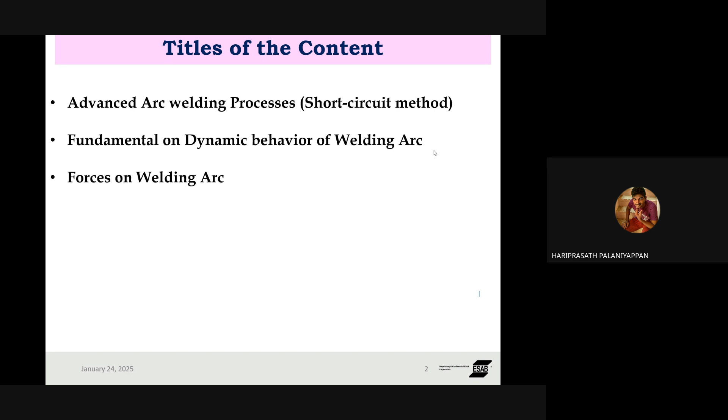The basic titles of this presentation are composed of three phases. One is advanced arc welding processes, purely based on short circuit methodologies. Then fundamentals on the dynamic behavior of the welding arc, and then forces acting on the welding arc - how the welding arc forms and behaves in welding processes. So we will detail these three titles.

So we are going with advanced arc welding processes. Nowadays, the reason we are going to advanced arc welding processes is there are many limitations and issues based on the complexity of our applications. The modern generation has grown up, and due to this and the requirement being more complex, for fabrication purposes we can't rely on commercial weld processes alone. So in the welding domain too, we are developing advanced arc welding processes to establish better solutions for current market requirements.

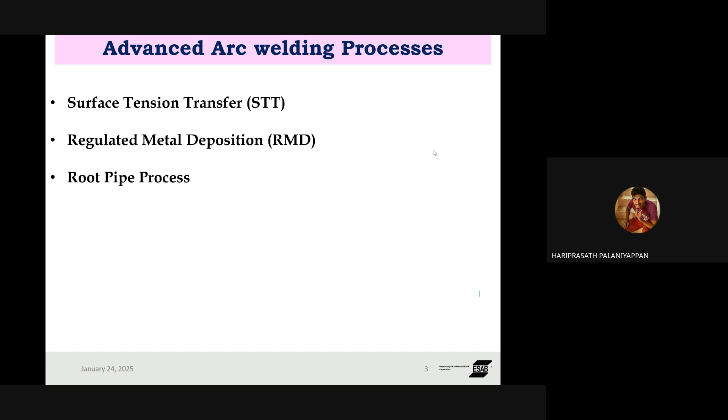So first of all, I start with the older process, surface tension transfer, which we call STT process. The second process is regulated metal deposition, which we call RMD, and then the root pipe process. These three processes were produced by three different major companies in the welding and cutting domain. These three evolved in different eras based on different advancements and market requirements. So we can go into why these processes evolved compared with our commercial arc welding technique in the upcoming slides.

Okay, so this is the conventional short circuit waveform. We know the MIG process - one of the most widely and highly used arc welding processes in the world. So among this, how will it behave? We can say it's a conventional GMAW process - gas metal arc welding. In other words, we can say MIG-MAG: metal inert gas welding, metal active gas welding. Based on the gas combination, it will vary.

So whenever we study the basics and fundamentals, we study about the arc, but we don't want to go into the in-depth concept of the arc. But if we go into the in-depth concept, let's see this figure. This shows the conventional GMAW short circuit process - it clearly shows how the short circuit forms, how it gets contact with the base material, and how it detaches corresponding to the current and voltage. From this figure we can clearly see 6 different phases, and based on these 6 phases there are differences in current and voltage, corresponding to current and voltage. So here in the first phase...

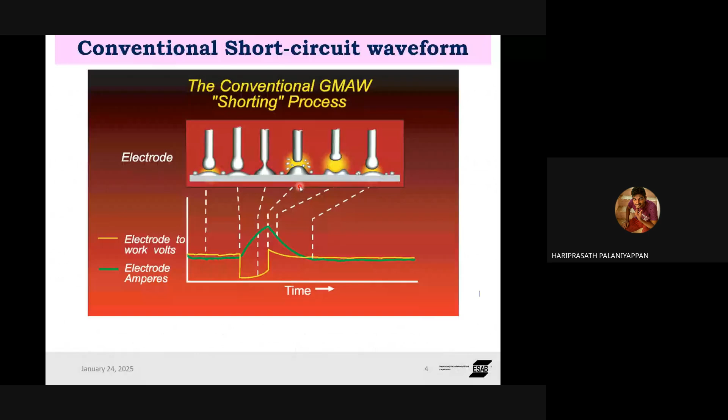These are all the conventional short circuit waveform. So why are we moving from the conventional short circuit waveform to this new waveform? We are getting some limitations for the root welding - larger heat input. This can lead to excessive penetration, burn through, and distortion, especially in thin materials and tight joints.

In thin materials, if you're welding thin sheets below 3mm and 2mm, if you weld with the commercial GMAW process, it's very difficult to weld. Why? Because the heat input of commercial GMAW process will be very high. So these are all very difficult to weld with thin sections, as well as having a lack of puddle control.

Due to this, as we saw in the previous slide, we clearly see the rise and fall of current and voltage. It's a sinusoidal waveform, so there's a lack of control with the molten puddle, and spatter comes into the weld.

Due to this lack of control, the molten metal in GMAW can be fluid and challenging to manipulate, making it difficult to achieve root fusion. This leads to many issues, one of the important ones being undercut, poor root fusion, and porosity.

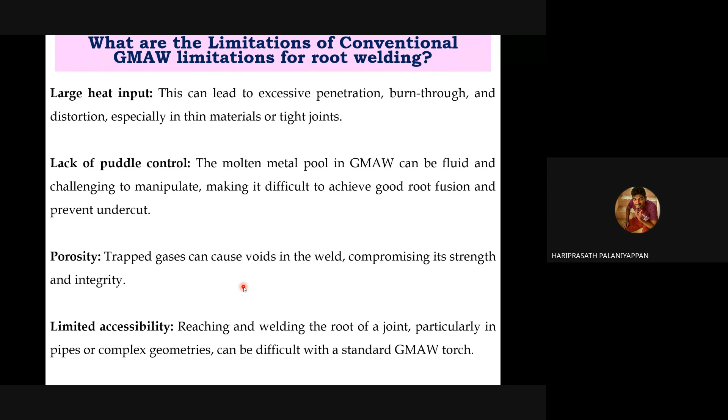So for this case, we need to look at how the GMAW process has adapted for root welding processes, through Surface Tension Transfer. This Surface Tension Transfer was developed by Lincoln Electric, by modifying and controlling the voltage and current waveforms.

Here too we have six segments, the same six segments we saw in the conventional GMAW process. One thing we can clearly see is that we couldn't get any spatter in this process. Let's look at how they controlled spatter through controlling voltage and current.

We can clearly see this in the voltage and current waveform. The yellow color indicates the current waveform, and the blue line indicates the voltage. With this, ball formation starts and then it interacts with the base metal.

During the interaction with the base metal, both current and voltage enter an off period. Then a ramp-up period happens with the amperage and voltage. During this ramp-up period, ball detachment happens at the base metal.

After necking happens at the base metal, the current and voltage waveform is again suddenly controlled back to the off period. With that off period, complete detachment happens without any spatter formation. So we can say it's a 100% controlled, spatter-free process.

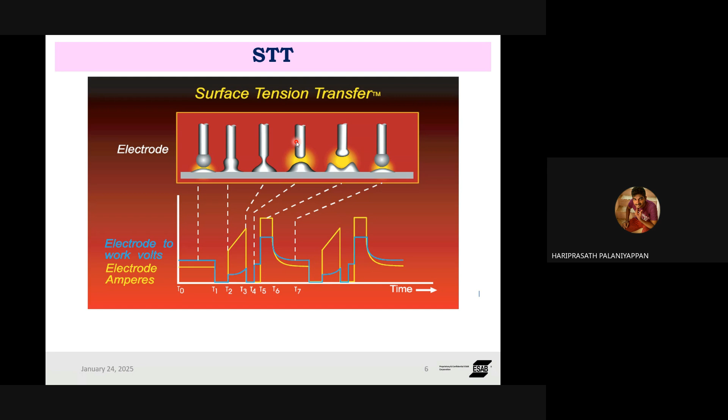This was developed in the late 90s. This gives a complete understanding of how STT happens, from the background current to the pinch current, peak current, and the tail-out sections.

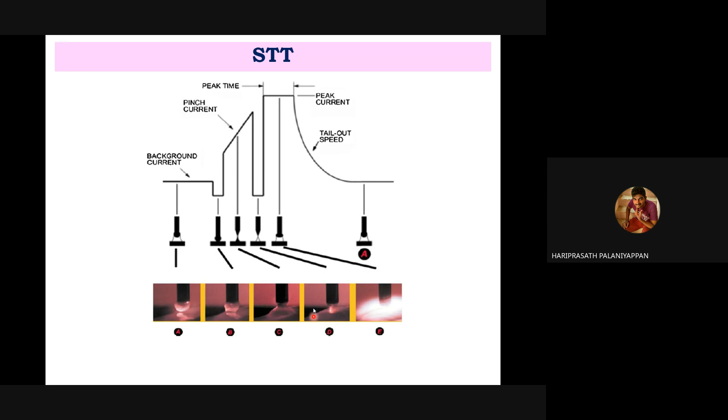From the slow motion figure we can clearly understand how the ball forms, how it interacts with the base metal, how it tries to detach from the base material, how it completely detaches, and the initiation of the next cycle. This is how it happens with STT.

After STT, Miller, one of the worldwide welding and cutting equipment companies, also produced a variant to help adopt the root welding application. They named it Regulated Metal Deposition, or RMD, as it's commonly called in the market.

This is a somewhat improved process compared to STT. How is it improved? Similarly, both the STT process and the RMD process are achieved through modification of the current and voltage waveform, controlling how they operate.

Based on this, we get better ball transfer and better control of the puddle, which means better weld control. With this, we can easily operate and accommodate root applications. Here we can clearly see, similar to the STT process, we initially get a wet period.

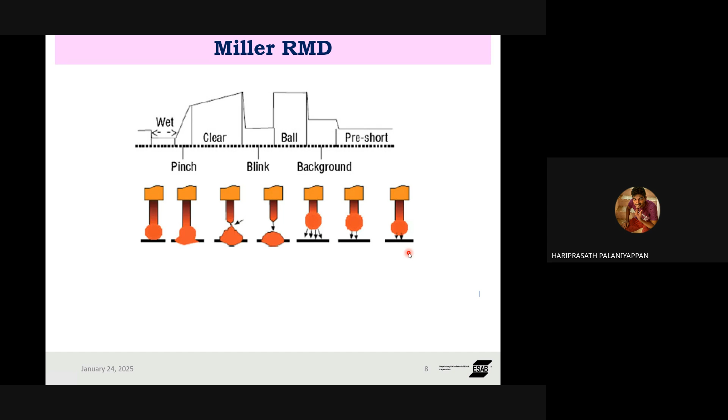So this is the ball formation period, and then the rise of current gets the ball interacting with the base material with minimum dilution. After that, the current rapidly rises and completely gets necking, with clear necking of the metal droplets. During the blink period, the droplet gets deposited on the metal. After this, another cycle starts again, how the ball forms and interacts, finally interacting with the base material. So similarly, ESAB is now introducing a new process.

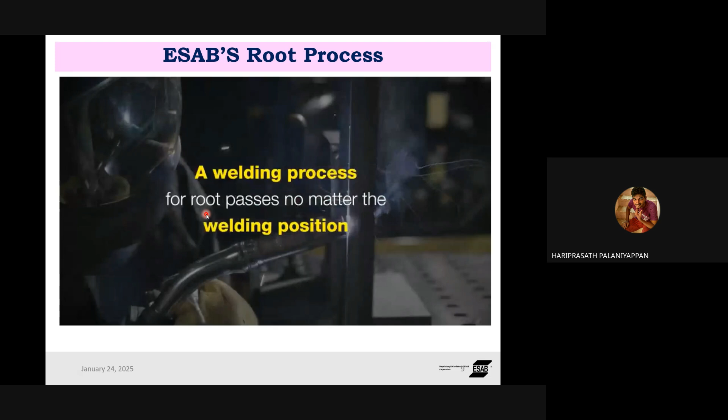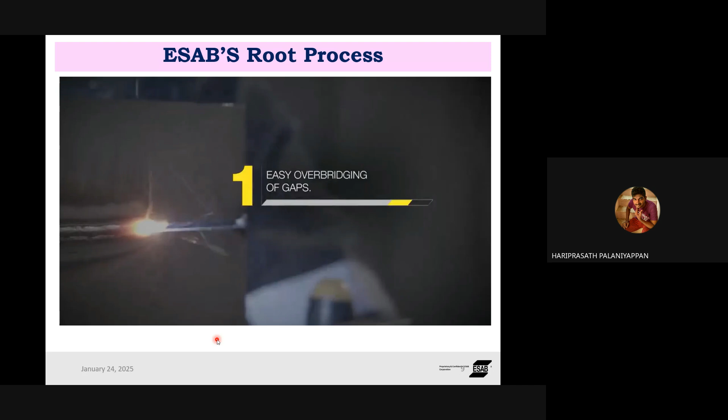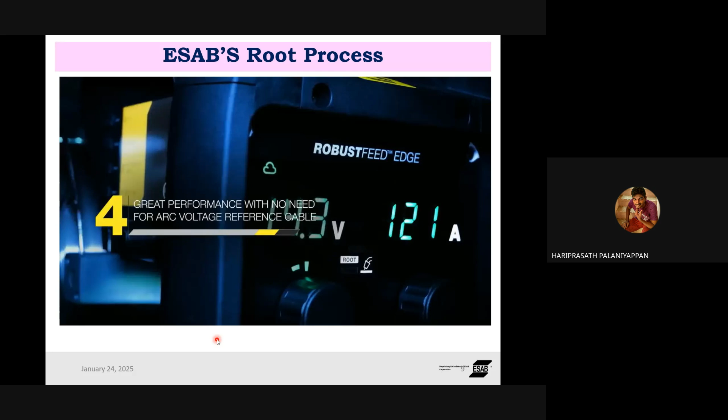This video clearly explains how the root process evolved. This is a recently patented process by ESAB for root application. About two processes were earlier developed. From this understanding of those processes, they evolved with better, excellent control in all the processes like 1G, 2G, 3G, and 4G and vertical up processes, with greater performance through controlled voltage. During different welding positions, controlling the current and voltage will be difficult with those earlier processes. With this, we can achieve enhanced current voltage capabilities.

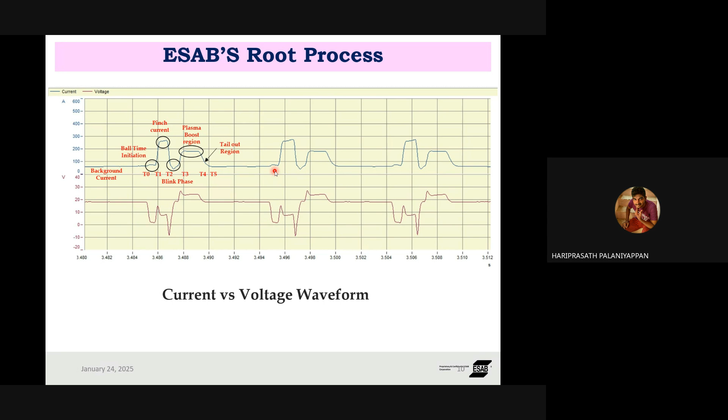Now the droplet has interacted with the base metal, but we need to deposit the droplet in the base metal through again increasing the rise of current. With the rise of current, we can say it is a plasma boost region. With that boost, we can detach the metal droplet, and then another cycle starts. With this, we get better puddle control compared to other already established processes in the market.

So what are the stages in this waveform? We can clearly identify the background current. This is the current level of the arc prior to shorting to the weld pool. It is already at a steady state current level. The electrode approaches the workpiece. We can see how it forms, and then the ball initiation time.

We can identify it based on time, as I put it in the time period of T0 to T1, just before the electrode is about to complete the short, it's a background current. The voltage sensing clip reads a decrease in voltage, and the machine drops the amperage. Then the pinch current happens.

During the pinch current, it's a rise in current. The wire is still being fed. Also, fusion occurs between the electrode and the workpiece. In order to transfer the molten drop, the amperage must be increased, and high current is applied to the shorted electrode in a controlled manner. This accelerates transfer of the molten metal from the electrode to the weld pool by applying electromagnetic pinch forces. We can see this in the upcoming slide, dealing with how the forces and the ball formation happen.

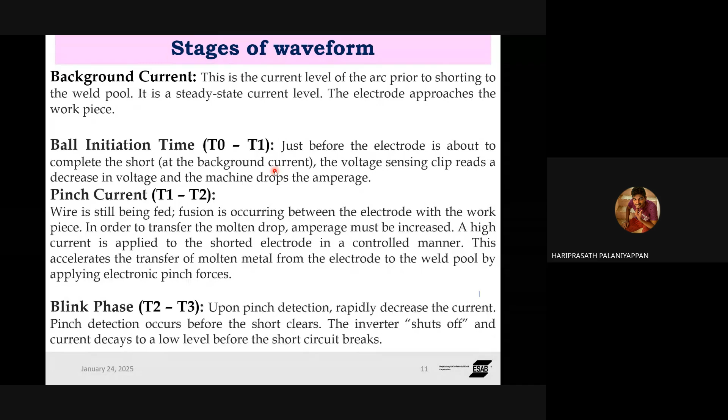We will discuss this. Initially, next is the blink phase, the time period of T2 and T3. Upon this pinch detection, the current rapidly decreases. The pinch detection occurs before the short clears. The shutoff occurs and the current decays to the low level before the short circuit breaks.

Similarly, in the plasma boost region, the amperage is again increased to control uniform separation. The plasma boost region helps control the uniform separation of the ball and creates the weld bead with little spatter. We can control this spatter level, we can completely eliminate this spatter, and better control the spatter and molten metal.

Similarly, in the tail-out region, this is the period of the cycle where the arc current is reduced from the plasma boost region to the background current level. In this tail-out period, the current goes from the higher level down to the initial background level, and then it is ready to repeat the cycle.

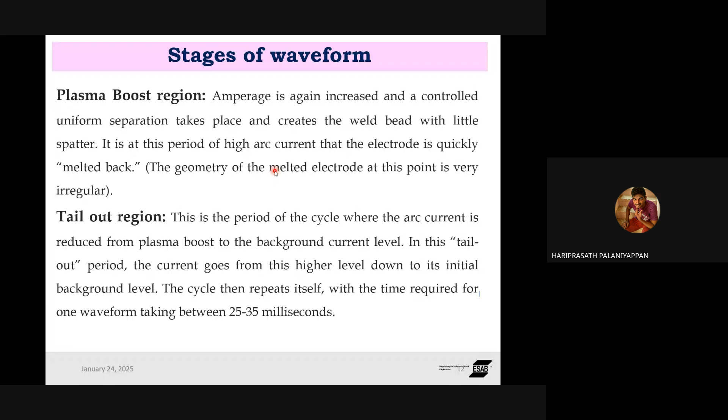So these waveforms will vary based on the wire feed speed, so it's a customized waveform.

Now we can move to the next phase of this session, dealing with the dynamic calculation of short circuit waveform. Generally, the dynamic behavior of the waveform in short circuit mode - all these arc welding processes come under short circuit welding. So how does the short circuit happen, and during the short circuit how does the metal get melted and deposited into the base metal, how it gets better, and how the metal ball can be calculated - we are dealing with these things.

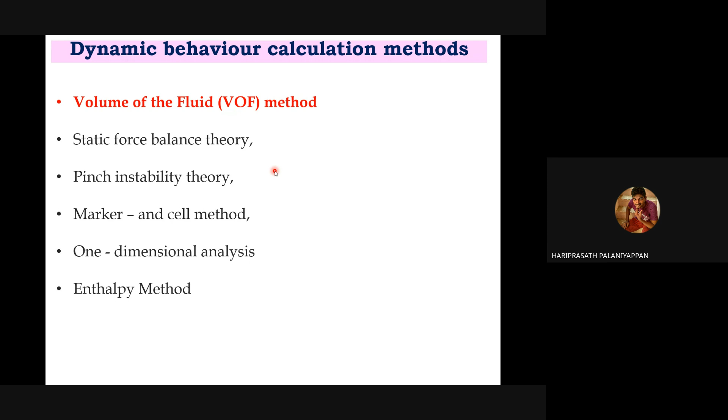We can calculate this dynamic behavior of ball formation and transition with various methods: the volume of fluid method (VOF), static force balance theory, pinch instability theory, the marker and cell method, one dimensional analysis, and the enthalpy method. These are all used to understand the dynamic behavior of ball transfer in the metal.

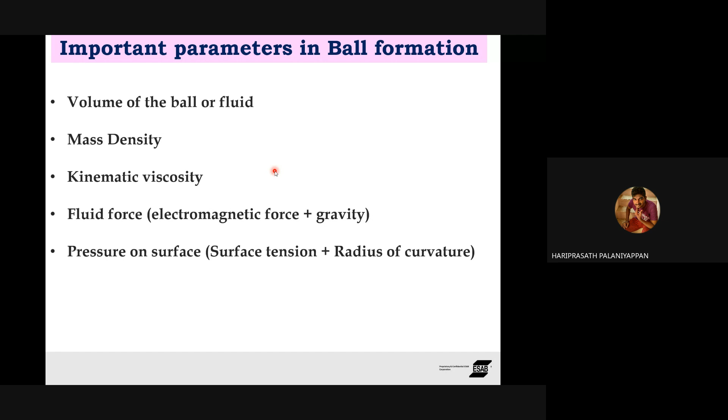The important parameters in ball formation are the volume of the fluid, the mass density of the material, kinematic viscosity, and fluid force - which we can say is electromagnetic force plus gravity - and the pressure on the surface in terms of surface tension and the radius of curvature of the ball.

Rather than just this dynamic calculation, we will do both - the theoretical calculation of how the ball will form and detach during welding, and we can capture these things with slow motion video using a high speed camera, to see how the ball gets attached and transferred in short circuit mode. Rather than relying only on the high speed camera, we can estimate these things theoretically too. This theoretical manner is how the practical implementation has happened in the past and present days, so from this we can easily calculate the ball transfer and the volume of the ball.

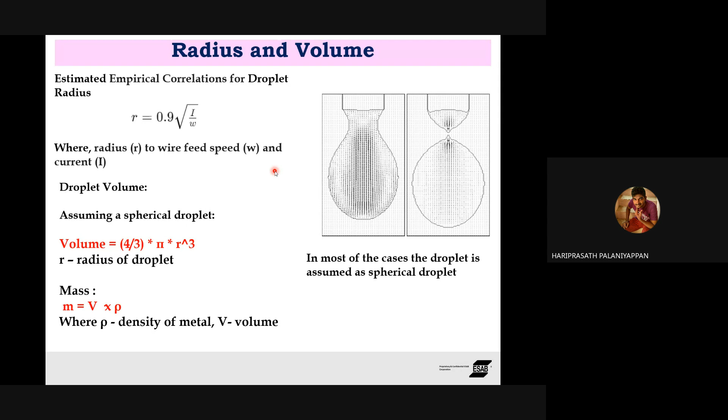How can we get the volume of the ball? Generally the fluid flows with spherical droplets only. Through this spherical assumption we can easily calculate the simple formula for volume and mass - mass is calculated with density and the volume of that fluid. Similarly, after volume and mass, we can easily calculate the forces acting on the metal droplets.

There are several forces during welding when short circuit happens. The current and the magnetic field will form a flow in the opposite direction to the flow of current - we can call this the Lorentz force, based on Lorentz's law and the Lorentz-based force equation. So what are the forces acting on the metal droplets?

There are four major forces: electromagnetic pinch force, gravitational force, drag force, and surface tension force. With these four different forces, the metal droplet detachment happens. The electromagnetic Lorentz force equation is very simple, involving the current, the effective conductor length, and the magnetic field strength.

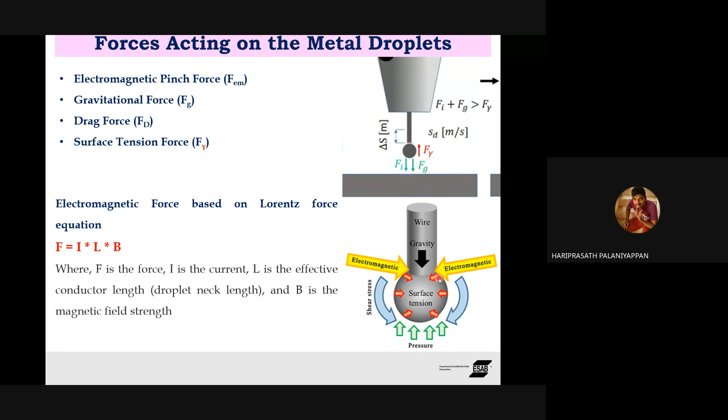We can clearly see how the pinch, or necking, forms from the ball, not only due to the ramp up of current - while increasing the rise in current, it happens along with increasing magnetic field. So we call this the electromagnetic pinch force. With that electromagnetic pinch force, the metal detachment happens.

So what are the other forces in the metal droplets? It's the drag force - mostly the drag force happens in GMAW processes through the gas combination. What are the gas combinations? The shielding gas - each shielding gas has its own nature. If you use pure argon, it will differ; if you use argon with O2 mixture, it will differ; CO2 mixture, it will differ; and pure CO2, it will differ. So the drag force also plays an important role.

Next to that is the surface tension force. So this is short circuit mode.

So in the short circuit mode, the ball will form and make contact with the base metal and then get detached. During the contact with the base metal, there will be a surface tension with the base metal. So we need to calculate that surface tension force to understand how the metal deposition happens in this short circuit process.

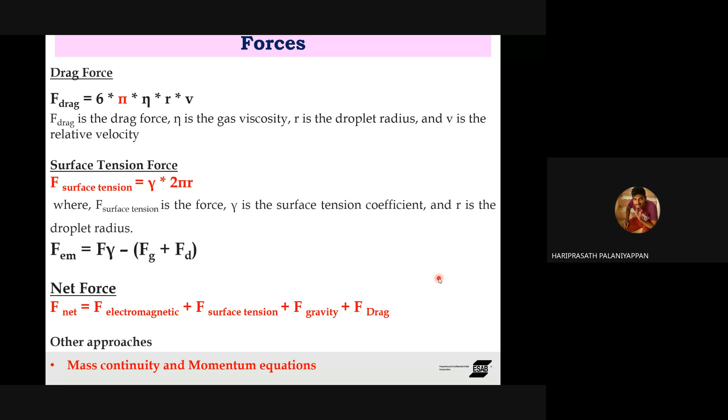Through this, we can validate the velocity and the acceleration. We can calculate the general formulas, and then from that, the basic sample data.

I calculated sample data for your inference. I tested with a wire diameter of 1.2 mm with mild steel, which we can call ER70S, and with a gas mixture of 80% argon and 20% CO2, which we can call M21 gas.

From this, we can calculate the complete resultant force. What are the forces acting on the metal droplets? We can calculate that.

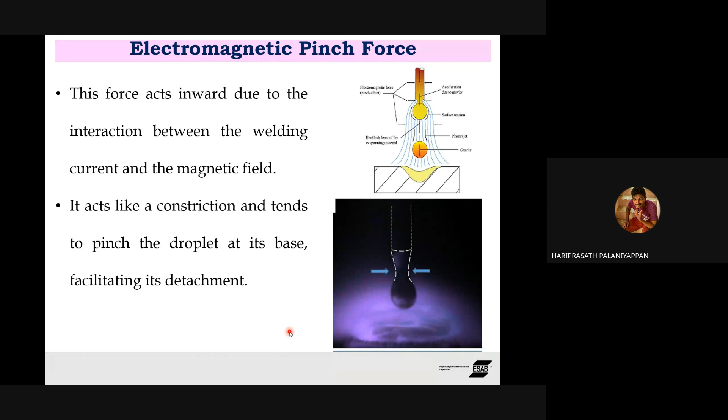Now we can clearly understand this photograph, which indicates the slow motion figure of how the electromagnetic pinch force happens on the metal droplet. This force acts inward, so it squeezes the metal droplet and detaches the metal ball. It acts like a constriction and tends to pinch the droplet at its base to facilitate detachment of the ball.

Next to the pinch force, we can go with the drag force. The drag force mostly happens due to the gas flow, so we can say different shielding gases.

We have commercial shielding gases: pure argon, meaning 100% argon, argon plus CO2 mixture, and argon plus O2 mixture. In the MIG process, we mostly use mild steel with argon-CO2 mixture for better arc stability and better ball detachment. We can say 90-10 and 80-20: 90-10 means 90% argon and 10% CO2 gas, which we call M20 gas, and 80% argon plus 20% CO2 is M21 gas.

So with this combination, carbon dioxide will create a force. Not only carbon dioxide, but argon also creates a force; based on these, carbon dioxide and argon will create the surface tension. Generally, oxygen will reduce the surface tension of the base metal. That's its nature - it improves the viscosity of the fluid flow through the oxygen. Similarly, some impurities like sulfur in the base metal will reduce the surface tension.

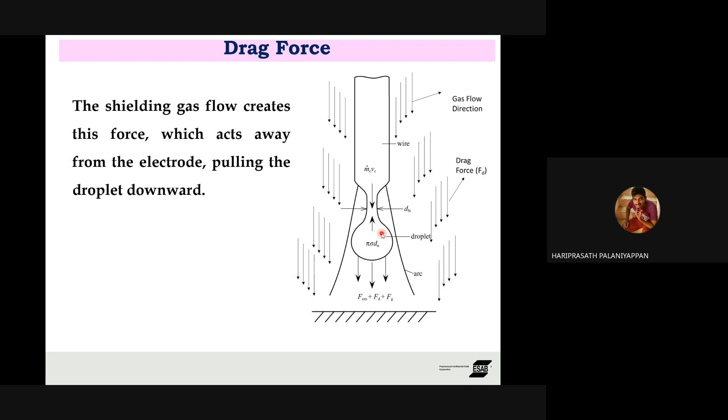Due to some external force and pulling force only, it will detach. For the external pulling forces, we can use electromagnetic pinch force as well as drag force acting upon the deposition to the base material. So now next we can deal with the gravitational force - maybe these forces are generally known to many of us, how these gravitational forces and all happen.

During the metal droplet detachment, all these forces acting at the time will rule the detachment of the material. And then we can go for the surface tension force.

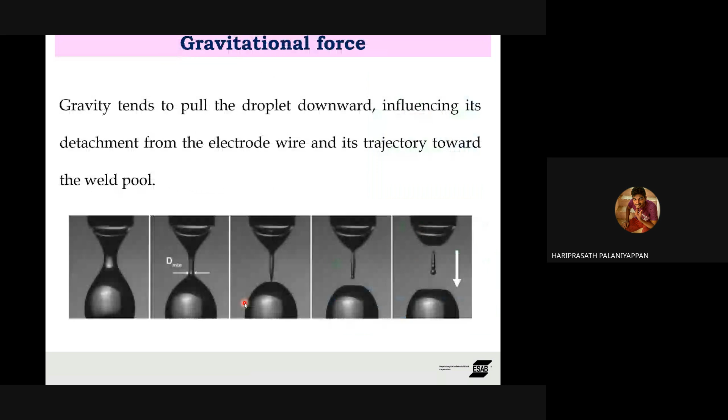Generally, surface tension is the tendency of the surface of the liquid to minimize the surface area. Whatever fluid you take, the fluid's nature is to try to arrest and make one shape - to create one surface area, and mostly that will be spherical. As the droplet forms at the end of the wire electrode, surface tension acts to keep the droplet together and restrict its detachment. From this we can clearly understand that droplet detachment involves one opposing force and three promoting forces.

With that one opposing force and the three promoting forces, we can clearly see how the drag force and others happen. So we can say the velocity of the fluid, drag force, gravity force, surface tension force and electromagnetic force - adding all these, one net force will be the output.

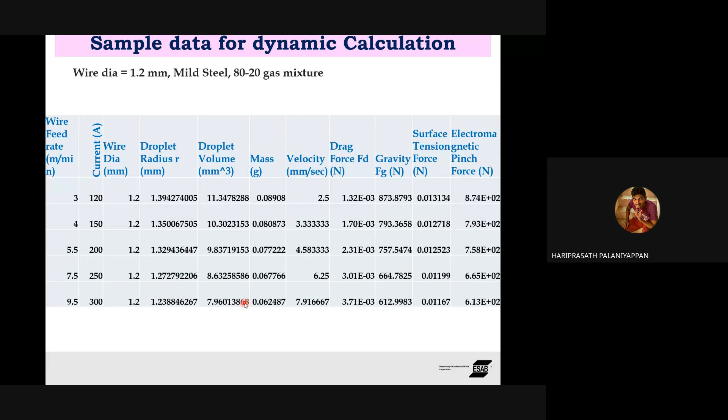From this net force, ball detachment will happen. From this we get the deposition of the metal droplets on the base material, and the deposition rate will vary based on the wire feed speed of the wire.

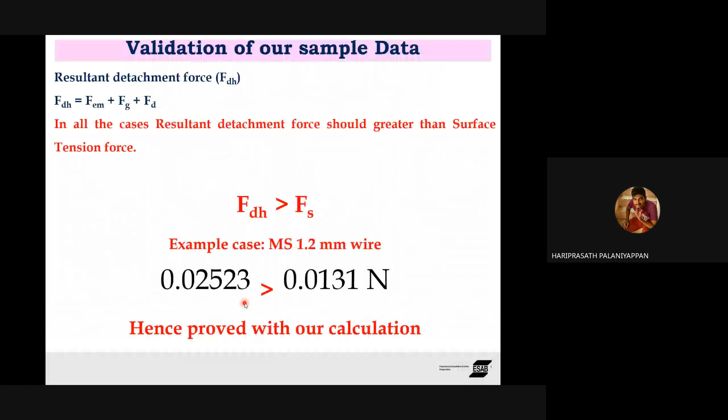In liquid, we can say it has attracting forces of atoms - a cohesive force. The cohesive force exists between the molecules. These forces tend to pull molecules closer together, which is why it tries to hold one area, meaning one shape.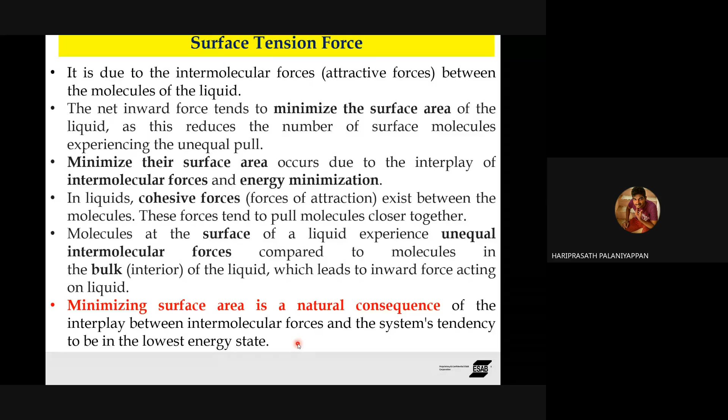From this, I will close. I think this presentation gives a good understanding of the advanced, recent weld processes for root pass pipe applications, particularly for critical structural applications like nuclear power plants, aerospace applications, and heavy fabrication - how these advanced processes were developed, with a bit more in-depth understanding.

I don't think many have gone in-depth into ball formation and ball detachment, the metal behavior in arc welding physics - what we call arc physics and arc welding processes. This should be a good inference and useful for young and future research fellows.

So if you have any doubts, kindly ask. Sir, I have finished, sir. Sir, yes sir. Yes sir, any questions? Yes sir.